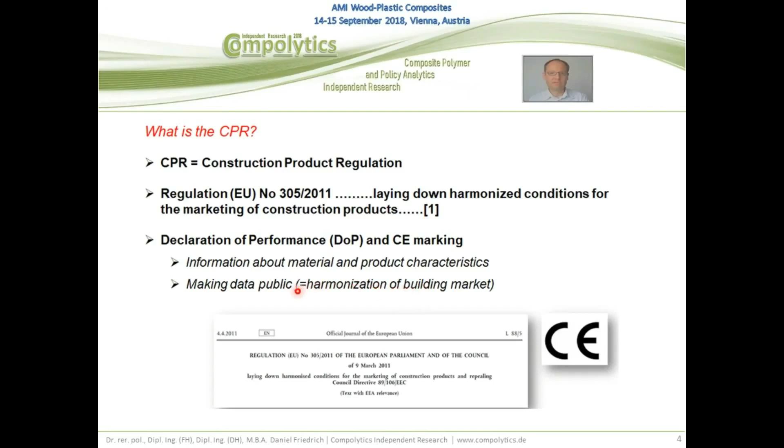Meaning that by doing so, these products must contain information about their essential product characteristics for their use in the building scope. It contains information for manufacturers on how to market and publish product-related data in order to harmonize the building market, so that architects and building planners can properly decide about the usefulness of such building products for their respective building projects by easily comparing the properties of such products according to the published data.

So once again, if we were a WPC cladding manufacturer, according to our Part 5 base norm for WPC cladding, which was released under the scope of a CPR because per definition our product is a building product, we are obliged to do the initial type testing and report the results according to the table given in the annex of this norm. We must make a CE marking on the product, as it looks like this, and the fire resistance must be declared by a notified external body, so we cannot do the fire resistance on our own.

But to be honest, what is not handled by all these norms and declarations is information about the wind load resistance of such an erected facade, where our WPC cladding panel is part of. Because remember, one of the first slides said that the EN norm for WPC does only cover the profile itself, but not the fixing mechanisms and the subrails and so on. So the complete facade system is outside the scope of the 15534.

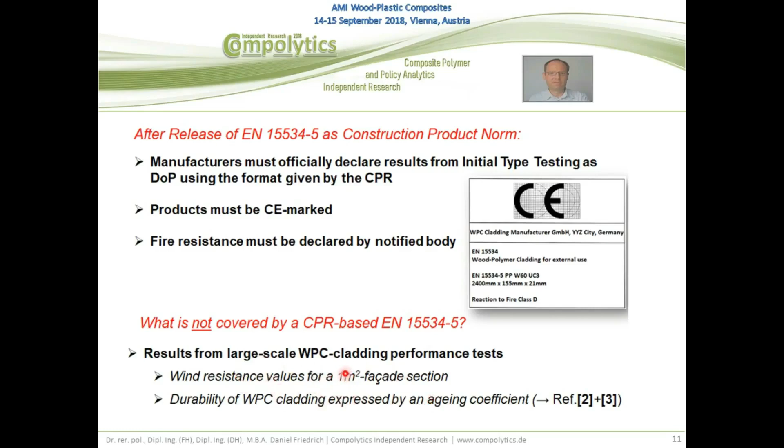Meaning we need further information about what tests should be done to also report such information to the facade planners, because they must also give a proof calculation to demonstrate that the chosen product within the facade of their target project is really fit for use - comparing the wind load resistance of this product and facade kit with the expected wind loads at their building project. So there should also be some laboratory testing, where such wind load resistances given in kilonewtons per square meter facade section are tested.

So we've seen there exist a good variety of norms to regulate this novel product WPC cladding. It should not be a problem for manufacturers to do all their homework, but on the other side it binds them for the coming years, and they have no flexibility anymore to change something on their material compound formulation, on their product system, and so on.

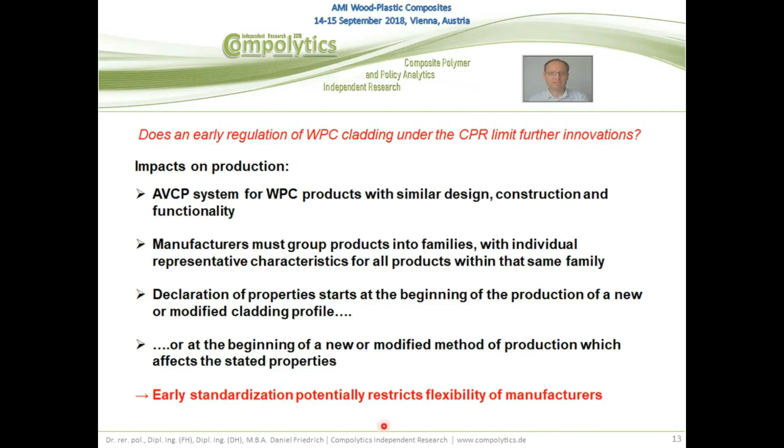So on the one hand, there is everything available to regulate their product and to successfully bring it to the market. On the other side, they renounce further flexibility, and maybe it is better to wait to cover the existing WPC Part 5 product norm under the scope of a CPR. Maybe it's too early, and this is something we try to clarify in the scope of Compolytics research, and we asked ourselves if such early standardization restricts the manufacturers too much.

So we started by creating a list about the pros and cons. What are the advantages for such an early handling of the WPC cladding norm by the CPR, restricting very much?

Maybe there are cost savings and higher compatibility of materials and components to norms. This is more trustworthy for designers in the market. We need a smaller amount of knowledge rebuilding. So once it's developed, it is kept as it is, and then it's only about producing, with no further optimization.

On the other hand, there are disadvantages. Newcomers are attracted to this novel market, and higher competition emerges in the market, maybe too early, and there is a downtrend for further innovation, so there is no incentive anymore to make further innovations and developments.

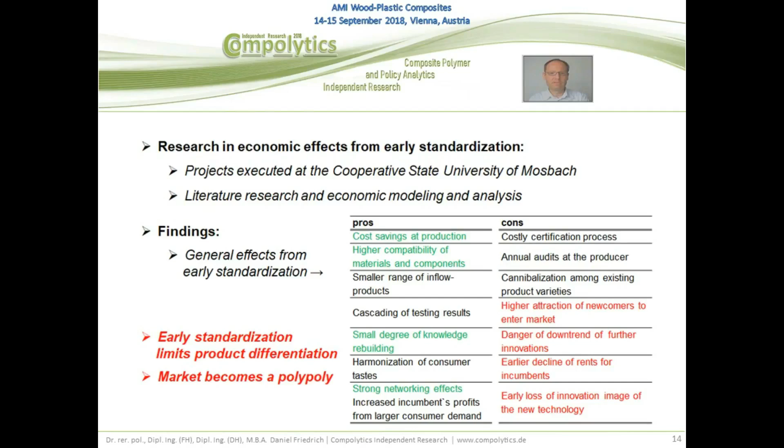Maybe the profits decline too early due to this tough competition, and maybe the innovation image gets lost too early when a high amount of mass-produced products are then released to the market also by others. So there are good arguments and arguments against such an early standardization phase.

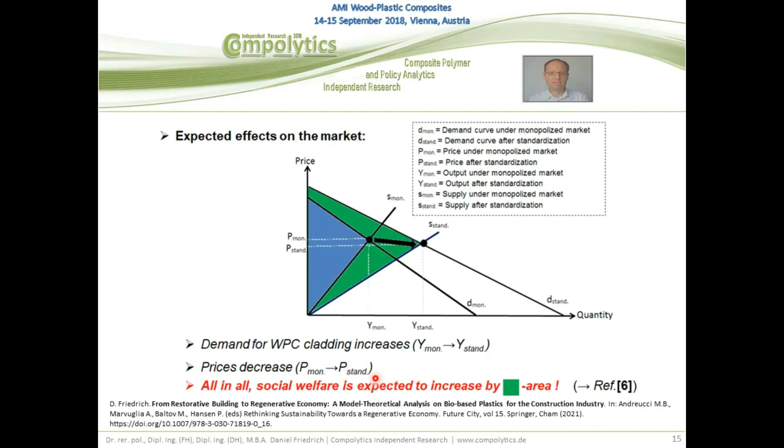As you can see here, the price decreases from a monopoly price to a standardized or polypoly price. In terms of society, the social welfare is expected to increase because every market which is turning away from a monopoly to a polypoly market will gain the highest social welfare ever, because prices are lowest and the volumes are highest of these products. So this is a good sign which speaks for an early release of the WPC product norm under a CPR scope.

What will happen with the profits? Let's take now the position of the manufacturers, because they are interested in keeping high profits. And this is also a result from this economic model theoretical analysis showing what will happen if we, as an incumbent firm...

So if we distinguish ourselves very much from these newcomers and competitors by a higher differentiation degree, our profits will increase much more than having a smaller distance to our competitors by showing quite similar qualities. And this is the main difference.

So we must have an interest under such an early standardization phase to further distinguish and differentiate our products from other manufacturers and suppliers. So we must continue improving and further innovating. Otherwise, our profits will go down too early, and this is a loss in profits.

So also for such an early standardization phase, this will push very much the incumbent firms to further keep up their innovation developments. There are already good strategies how to do this.

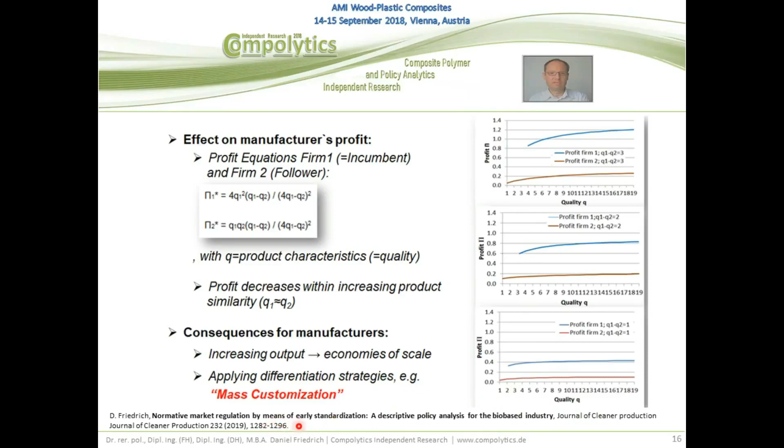So the basic lessons we have learned from this broad study is that since WPC still keeps its primary fire class D and E, so it's not that good a fire class, there's additional effort from the CPR arising, which means manufacturers must make a CE marking and a declaration of product performance, which demands a broad range of testing from them, also fire testing given to external bodies to increase trustworthiness.

The CPR demands consistency of the WPC product specifications with initial type testing, which makes further developments less flexible. Such an early standardization makes WPC cladding products more similar, increasing transparency in the market, and this is what is demanded by the EU Commission when releasing products under the scope of a CPR.

The market becomes more polypoly-like, and this maximizes social welfare, which was a result from the economic analysis. Corporate profit potentially increases when using a mass customization strategy, increasing the distance to the newcomers by further innovating even under such an early standardization where everything is already regulated by norms.

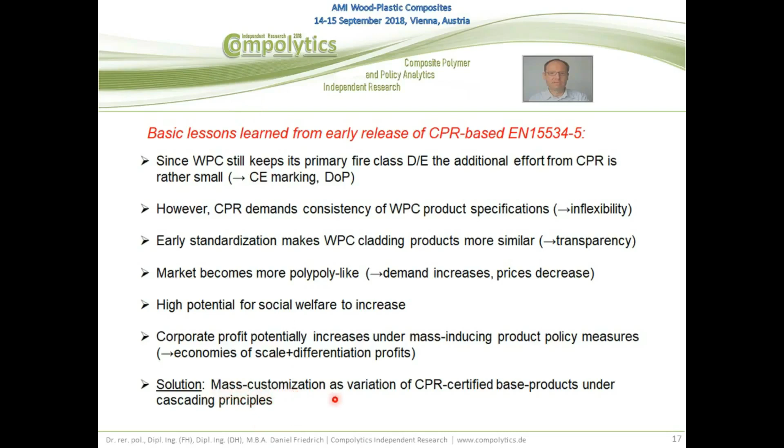And this is a solution and recommendation from Compolytics research: to pursue a mass customization strategy for such new WPC cladding building products.

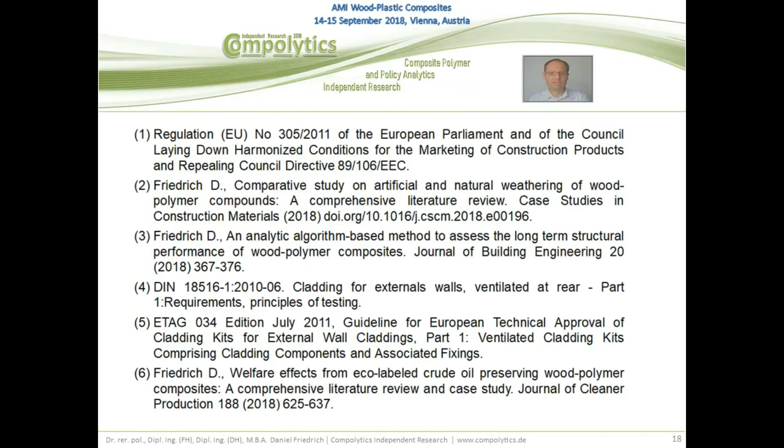This is an overview about the norms and references used in this presentation.